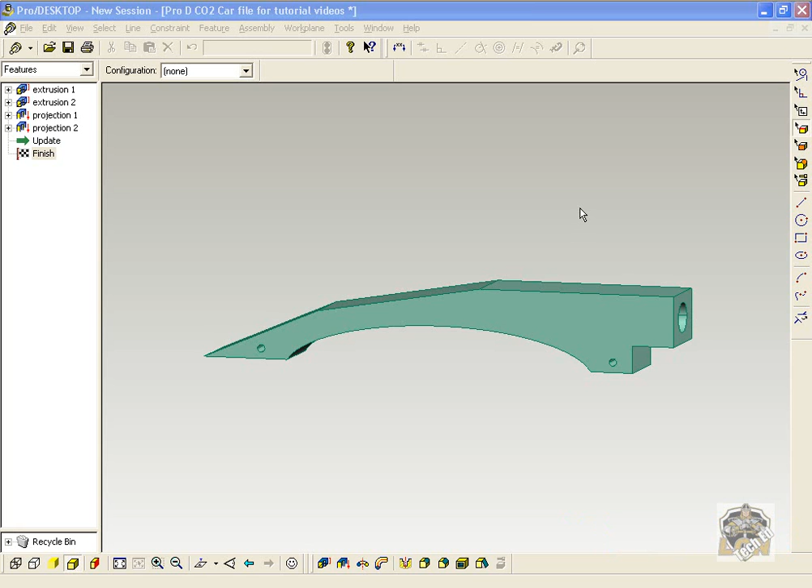This is video 5 of the CO2 car on Pro D, and I'm going to select this top face to start. I'm going to look at the top view. Let's rotate around a little bit better. We haven't addressed anything in this dimension, so we cut out that profile, but from the top it's still basically a rectangle, a chunk of wood.

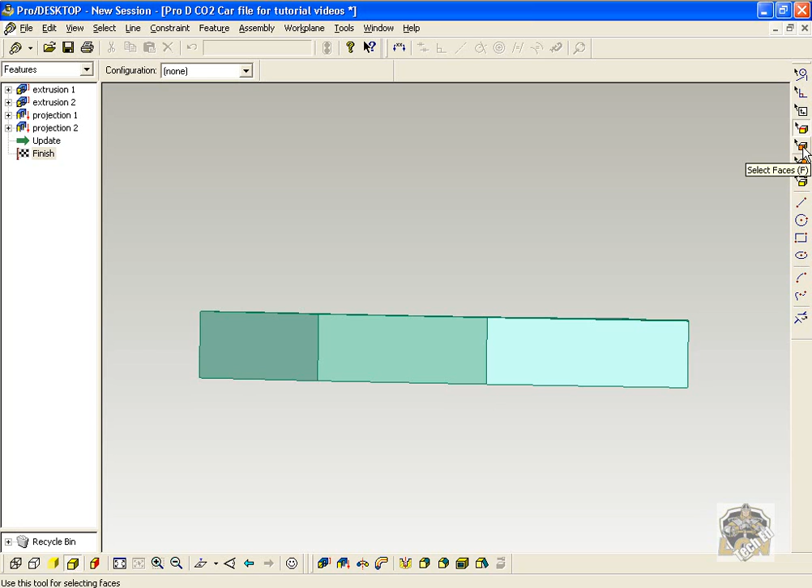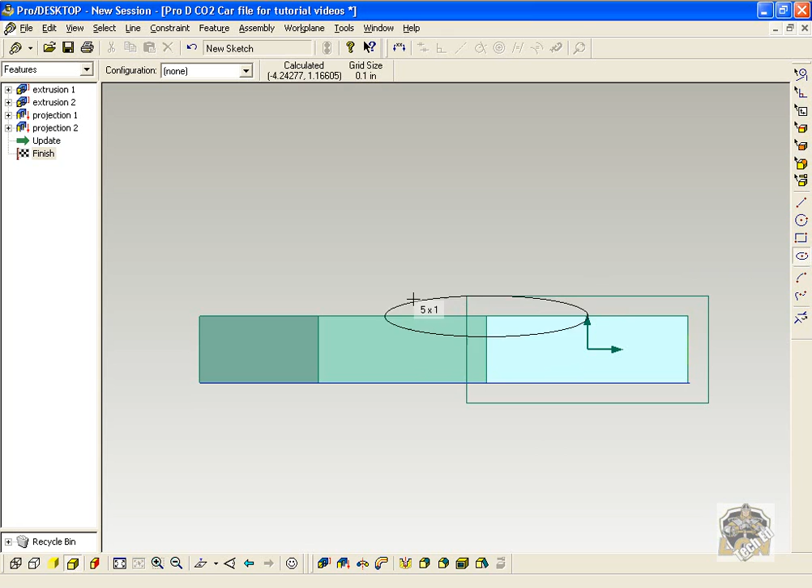So what I'm going to do, I'm going to select a face. I'm going to pick this face and put a new sketch, and I'm just going to call it top view, so this is looking down, and I'm going to hit Shift W. Now another technique we can do, I can draw on this face, but I can kind of extend beyond it. So for example, if I wanted to kind of cut like this and shave out some of the body, I could do that. So notice how it's beyond this face and it's kind of floating in midair right here.

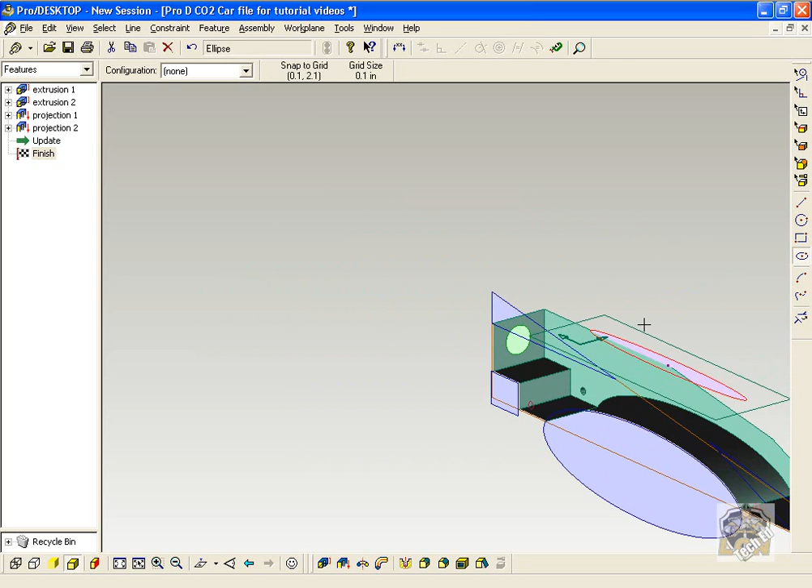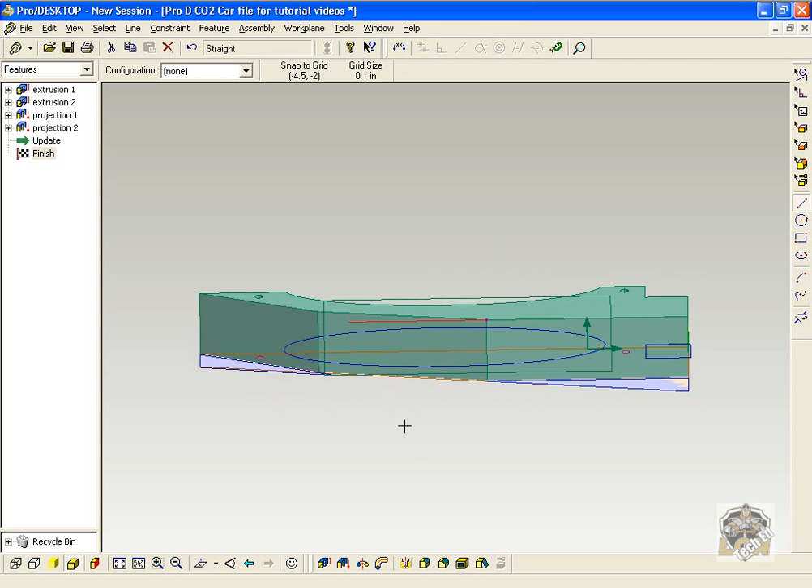That's fine. Even if it's not touching a part, let's go to this side, I can still extrude all this down. So I'm going to undo that and just get a little bit better placement. I want it kind of between the axles. So I'm going to take a line off this corner. I'm going to hold down Shift so it's straight. And I'm going to hit Control G. It's a new feature. It's a construction line. It's not part of a drawing. It's just for me to use as a reference.

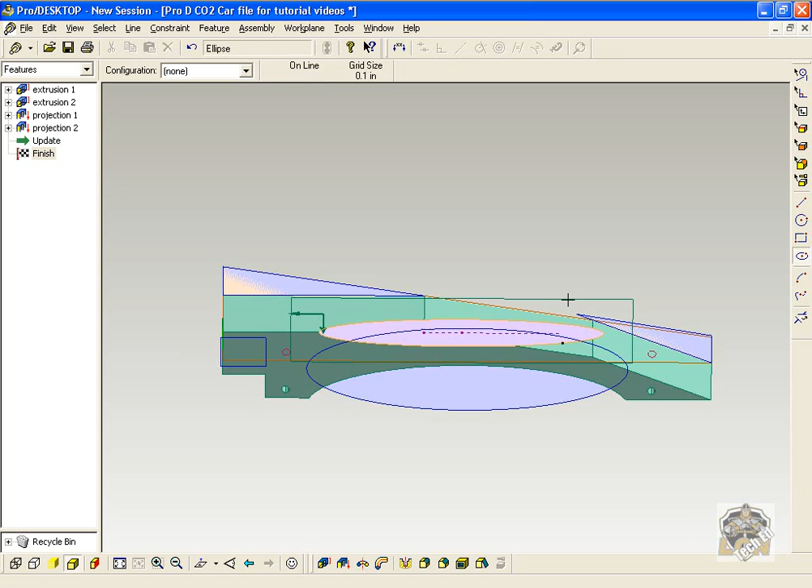So let's rotate this around. I'm using the mouse ball to just kind of hold and rotate. We have a lot of sketches, so it does get a little confusing. And then I'm going to go to the elliptical tool. I'm just going to sit somewhere on the line. It doesn't have to be perfect. And I'm going to kind of pull out something about this big. And I'll look at it from the top.

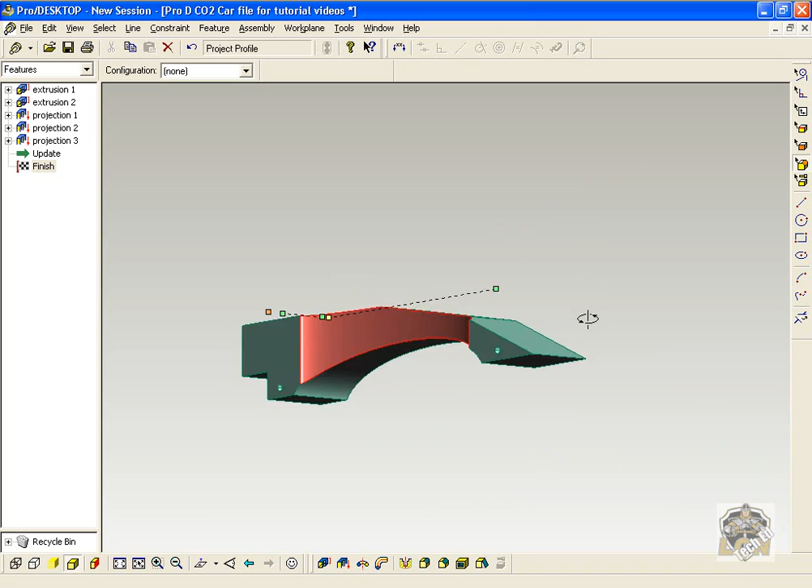Let's project it down and see what happens. Project, subtract material below work plane, and we'll hit OK. See how it cuts that out. Very common look when you get into the body design. Someone will take the bandsaw and just kind of carve out the side. I'm going to mirror that. So let's say we want that exact kind of cutout on the other side. We want it to be very symmetrical.

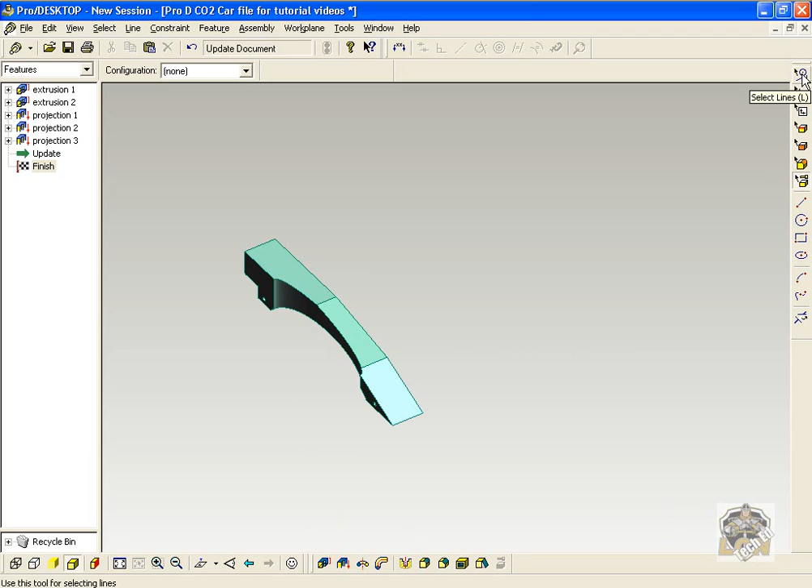So I'm going to go back to my Sketches tool up here, my lines. I'm going to click on this, and I'm just going to hit Control C for copy, and Control V for paste. Now notice what it did is it kind of took this sketch out. Shift W, so it's a good view. So there's no more valid profile. What happened? Because you have a double line, it pasted another sketch right on top.

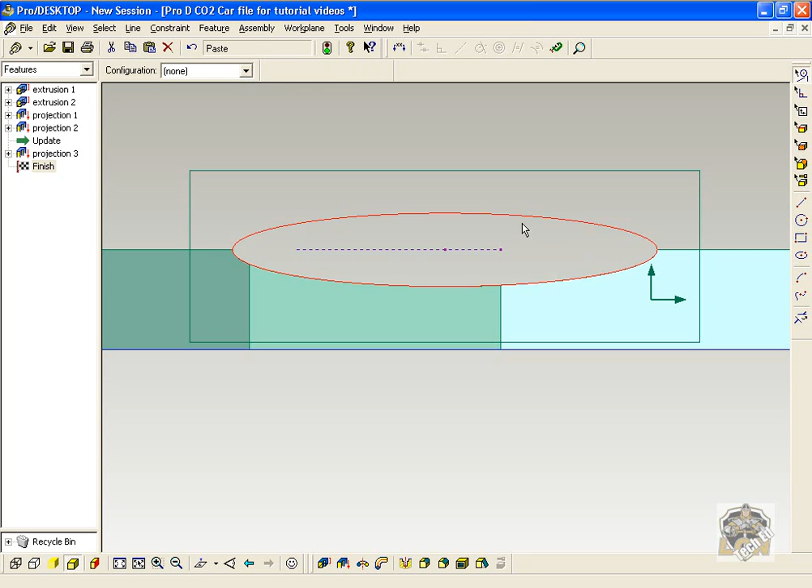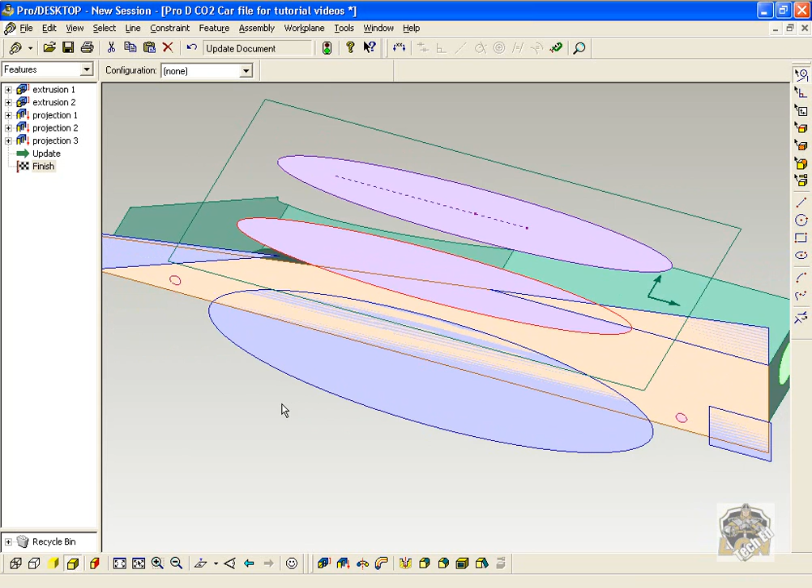So if we select the multi-arrow move tool, there we go. I'll pull the other one down. I'm just going to pull it straight down. I could eyeball this and say, hey, that's good enough. And for this design, I'm fine with that. And I can just hit Update. And then I'll turn on the 3D look. And you have something that's pretty symmetrical. If you want it to be exactly symmetrical, this is totally optional. We're just showing you videos.

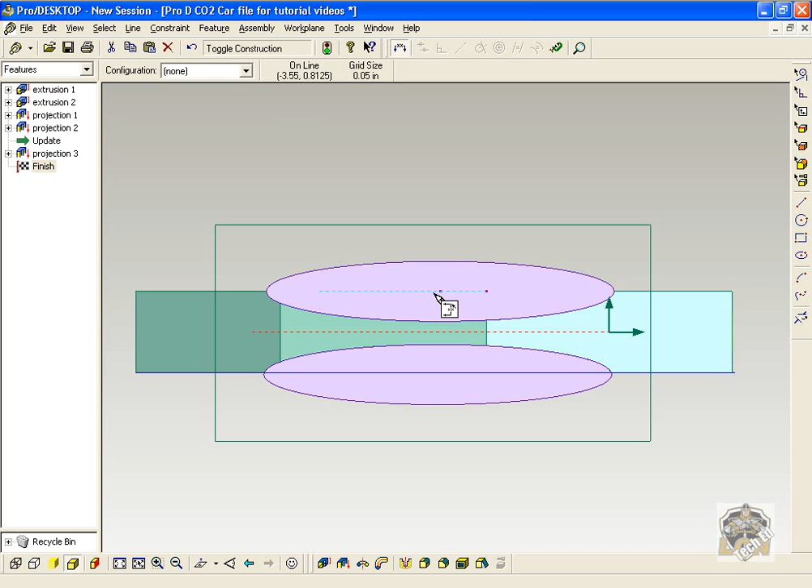I'm going to go back to my sketches. So upper right hand corner, back to sketches. Hit Shift W, so I have a flat work plane. And I'm going to draw a line from the origin. So this is going to be the exact middle. Control G to make it a construction line. And I'm just going to dimension the center of the ellipse to this line. And I get a dimension. And I'll do the center of this ellipse to this line.

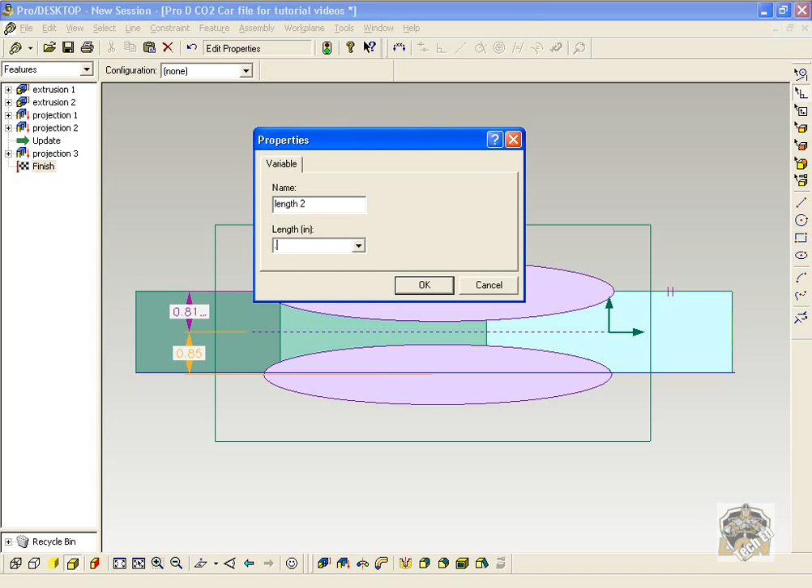And then if I wanted to, I can go in and change these. And that's 0.8125. And let's make this one 0.8125, and it'll just change a minimal amount. There you go. You hit Update, and now those two are perfectly spaced, even though it doesn't look like much of a change.